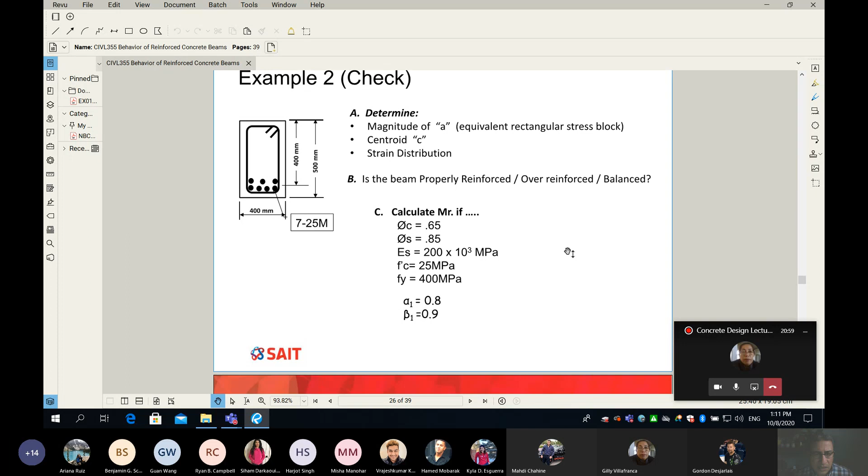Anyway, so let's move on to our class today. And I know that things are getting a little bit difficult. Okay, but again, let's see if saying it one more time can make it any better. So guys, here we are in the process of understanding the beam behavior. And we said in the last two classes that the beam behaves depending on the amount of reinforcement in your beam.

It can be tension failure, where the rebar will yield first before concrete crushes in compression, or both of them, concrete and rebar, fail at the same point, and this is called balanced failure. And then finally, if the concrete crushes first before rebar starts to yield, then it's called compression failure. We talked about this one. We looked at some videos, okay?

And it's obvious to me you guys maybe didn't get it very well, because some of you are looking for resources on the internet. Some of you are going to YouTube and watching videos from other guys. Fantastic. I don't mind. Do it, please, if you can. The bottom line for me is you be the best in concrete design.

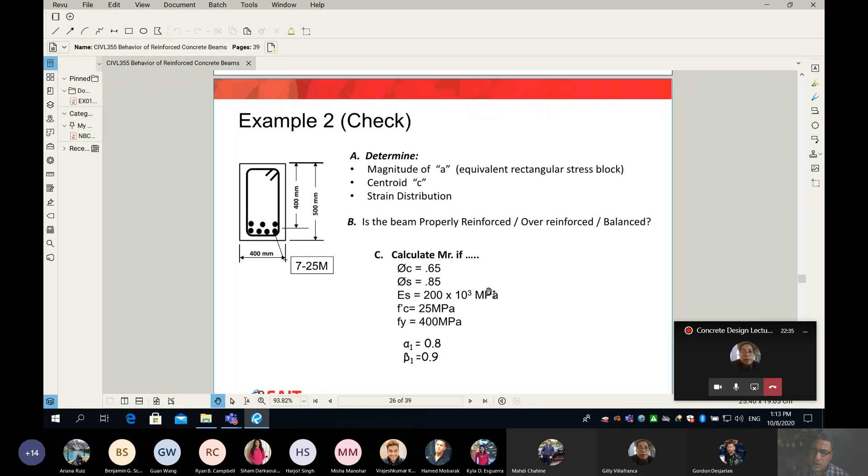But right now we're trying to put things in action by numbers. So here we go. We have a beam here on the left side with some dimensions, some rebar, some concrete strength. And my question is, can you please tell me whether this beam is going to be properly reinforced, overly reinforced, or balanced, with some given information? Now the way we do it is very simple. We follow a very systematic way.

So you can see here, my first step, you have to find your effective depth, because this is really what matters. We don't care about the H, the overall thickness of your beam. From the overall thickness of your beam, we should find the effective depth. In this example, I gave you right away the effective depth to be 400. In the assignment, you will have to do a little bit of effort, like in the lecture on properties of material, to find where the centroid is, and then you can find the D. Anyway, the D here is given as 400.

Next, you find the area of the steel. Remember, this includes only the main reinforcement. No stirrups, hangers, or skin reinforcement. So we have 7 bars, 25M. Hopefully you remember that every 25M bar has 500 square millimeters of area. Which means the total area of steel in my beam is equal to 3,500 square millimeters.

Then always, guys, that's what we do. We assume that the rebar has yielded at failure. This is just an assumption for now. Remember, assumptions are great. They make our life easy. However, before we make a final conclusion, we have to verify the assumption. We have to come back and make sure that whatever we assumed was right.

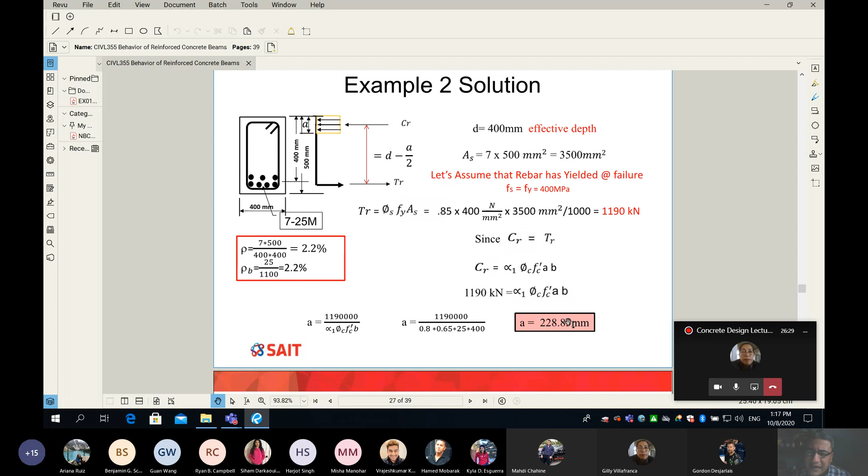You take your stress, you multiply by the area exposed to the stress, which is A times B, where B is the width of your beam and A is the depth of your compression block. From that, you can see everything is known except the depth of your compression block, which is A. So mathematically, we can find the A. Remember, when we find the A, it somehow defines the location of the neutral axis, because the A and the C are related, okay?

How? Very simple. If you want to find where the neutral axis is, as defined by the parameter C here. So guys, this C here defines where my neutral axis is. Very simple. You divide the A by the beta 1, which is 0.9, you get your C. Guys, once you know the little c, as the location of the neutral axis, you can draw your strain diagram. So this here, I'm going to box it out. This is what we call the strain diagram.

On the top, it is always concrete maximum strain, 0.0035. And then at the bottom here, we don't know. So we are going to assume it's epsilon s. We don't know right now whether this number is equal to the epsilon yield or more or less. So we leave it as is. Then we put all the other dimensions. From the top to the neutral axis, it will be C, whatever we got from this equation. And then the rest will be D minus C. We do the similarity of triangles, and then we got this value for the epsilon s.

Once you know the epsilon s, it's a very simple comparison. You compare the epsilon s against a constant number. It doesn't change in my course. It is always going to be 0.002, which is constant for rebar of 400 grade. Maybe if I change my rebar to another grade, then this number will change. But in my course, this number is the same.

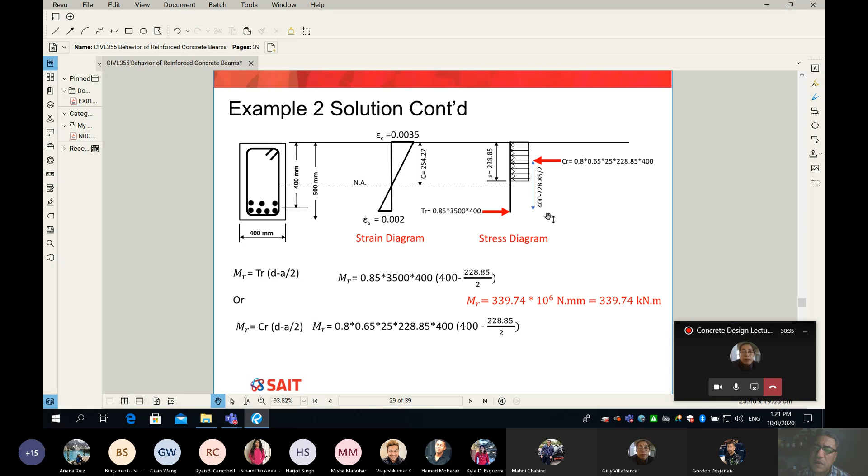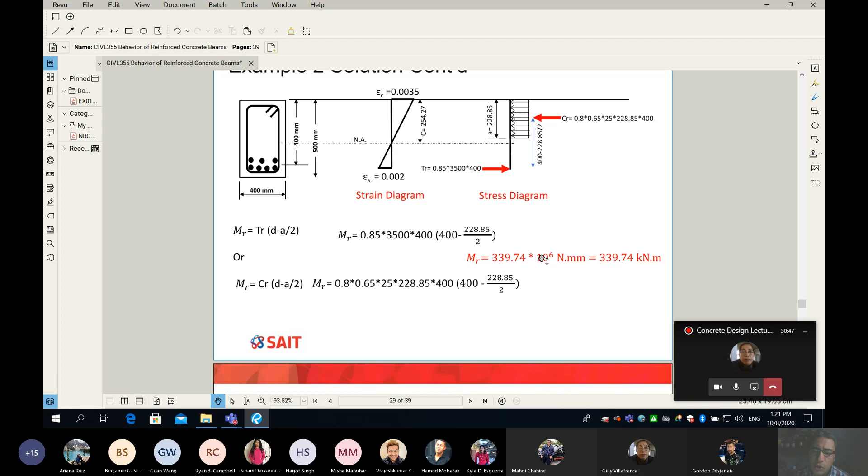And as I said, please calculate the moment of resistance or the beam capacity from both tension and compression. Because simply if we get two numbers to agree, this is a numerical check for my calculations. Are you following so far? I need to hear your voice. Did it make it any better than last class? Yes, we're following. Yes. Thank you, sir. Okay, so now it's time to go.

So far in my class, you have seen two examples by number on two different beams that have different behavior. The first one, example one, tension failure, ductile, properly reinforced. Beam number two was balanced and it is brittle. And question number three, or example number three, which is on my screen right now. So what we did is, for the same beam in question number two, we added like 3 more rebar. You guys see the difference, huh?

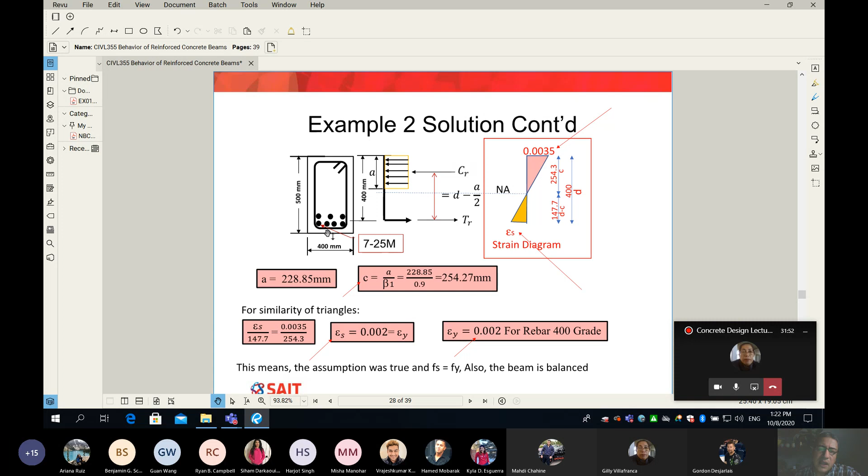If I go back one page, you can see this is my beam here, same dimensions of 500 h, d 400, the width is 400, and it had 7 25M. So I kind of copied the same beam here for example number three. However, what I did is I simply changed the number of the rebar from 7 to 10. It means I added more rebar. Let me do a temperature check.

Before we do calculations or any number, based on what you see in question number two, this beam, what do you think? Is it going to be overly reinforced or properly reinforced or a balanced section? What do you think? Overly. Over. You don't have to think even for a second. We already added more than what made my beam balanced. So if you add even a very small bar to the previous section, your beam will start to be overly reinforced because we have so much rebar in the beam. The stress will be less in the rebar, which will force the concrete to fail first in compression. Okay, so without any calculation, we know by now that it's going to be compression.

However, if I hadn't solved examples 1 and 2 for you, probably you wouldn't know. Yes or no? If this is your first example, would you know whether this is balanced or tension or compression? I guess no, huh? Just by looking at those numbers and eyeballing it, you cannot know. You mentioned that from the very beginning, before you made an example. Yeah, but what I'm saying here is if I never went through examples 1 and 2 and I gave you this beam, you cannot tell just by looking at the beam whether your beam is overly or properly reinforced or a balanced section. So anyway, that's why I'm going to start with exactly the same procedure as if we don't know, and let's see.

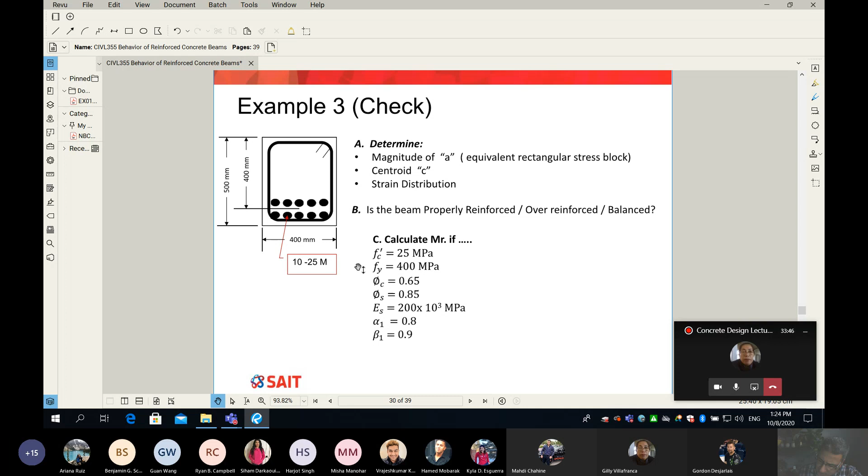So guys, as I said, same thing. You always have to start this way. You always have to say, let's assume that my rebar has yielded, and this assumption could be wrong or could be right. It is right in case your beam is properly reinforced or a balanced section. So I did the assumption already. I said, let's assume that my rebar has yielded, which means mathematically, the stress in the rebar equals 400 MPa. So what we do next is we go ahead and find the depth of the compression block, which is a.

Nothing more than, I'm going to say my total tension in my rebar is equal to my total compression in my concrete. And you guys know my total tension in my rebar is equal to phi S Fy AS, stress multiplied by area, and my total compression in my concrete, again one more time, stress by area, is equal to alpha 1 phi C f'c b a, and then you can see my formula. It will make sense for you.

So a is equal to phi S multiplied by Fy AS divided by alpha 1 phi C f'c and then b. Now all you have to do is, since we know all those numbers, we can simply use this equation to figure out what's the a. So based on the calculation you see right now, the a is 326.92. Okay, and I remind you, depth of equivalent rectangular block. Don't be confused. That is not the location of the neutral axis.

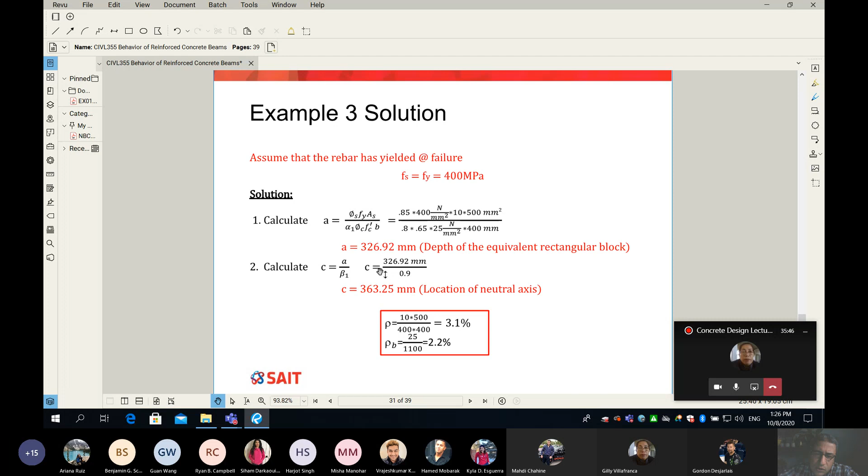Next is, we take the same number, we divide it by beta 1, which we agree in this class is always equal to 0.9. So we get a C, which defines the location of my neutral axis. Okay? Now we know the C. So I'm going to go to the next slide. If you know the C, we do the same thing. We draw one more time our strain diagram, and you can see always on the top, the strain in the concrete is 0.0035. And then you put your C.

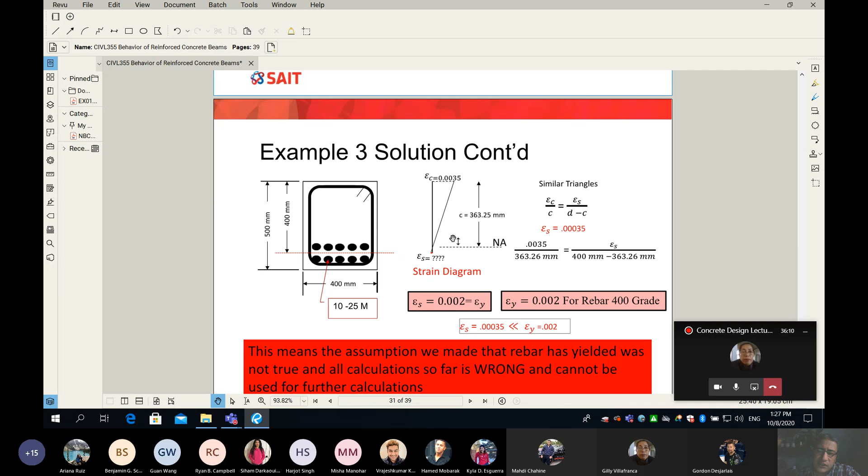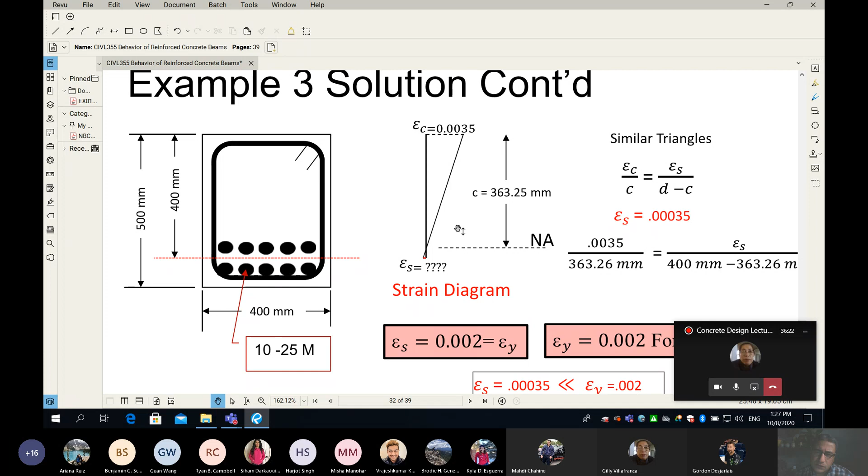And you can see here, the two triangles are still similar, but one is so big and the other one is so small, because my neutral axis is really, really attracted to the bottom, okay? So what you have to do, you do similarity of triangles, and what you will get is epsilon S. We are always trying to figure out what is my strain in the rebar before the failure, because simply this will tell me whether it's a compression or tension or balanced.

So in this example here, the strain in my rebar was only 0.00035. How does this compare to my epsilon yield, which is 0.002? Guess what? It is way less, which means if my strain in my rebar is way less than epsilon yield, I am before the yield. My beam failed when the rebar is still not yielded, okay? And this is the only time.

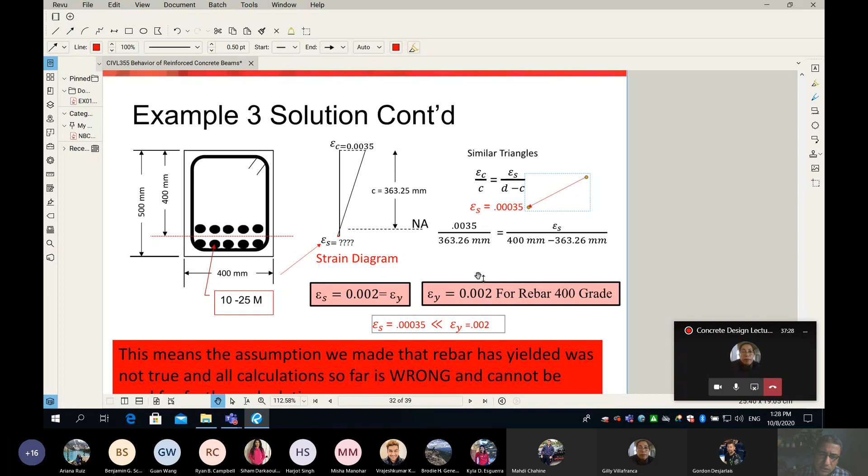Now I'm asking you, was my assumption correct? I'm saying right now that epsilon S is way less than epsilon yield, which is a constant. We are before the yield. So the assumption I made here, is that correct or wrong? No, it's wrong. It is wrong, guys. And if you follow, good for you. And if you don't follow, let me show you one more time, probably the last time, how the stress-strain diagram looks.

So this is my stress-strain diagram. From 0, I go with the line, and then from this point, we do the yield. So you can see this is my critical point here. This is where my rebar has yielded. And this dimension here is what we call epsilon yield. So this number is 0.002, constant, okay? When I estimate my epsilon S, which generally speaking is the strain in the steel when the beam failed, we figure out that my epsilon S was less than epsilon yield. It means I'm on this side of this point. It means before the yield.

And look at this. So where is my stress? Let me dimension that for you. So guys, from this point to this point here, this is my epsilon S, okay? How about my FS? Obviously, it is this dimension, from here vertically to there, and simply this will give you your FS. So this is FS and this horizontal is epsilon S. And you can see the FS is less than your 400, because where is my 400? It's from here to there. This is my 400 MPa, okay?

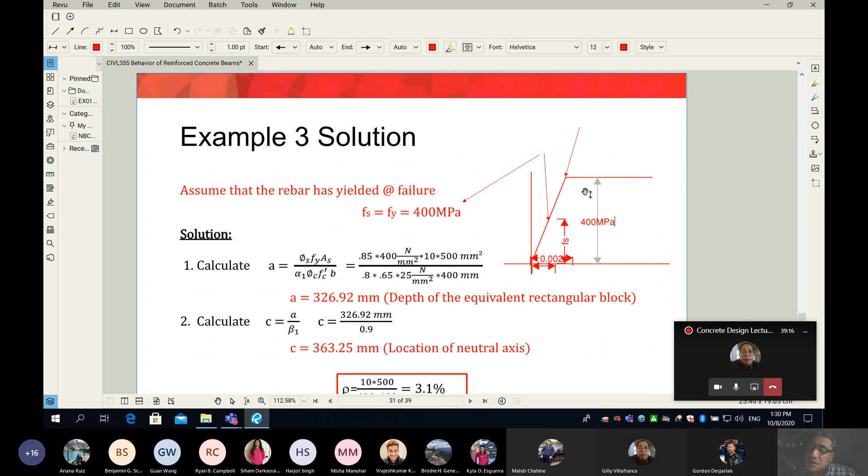So you can see if my epsilon S is less than epsilon yield, it means I'm before the yield, and it means my FS is somewhere less than 400. It means mathematically the assumption I made was wrong. And guys, I put it here in red, and I'll tell you why I put this in red.

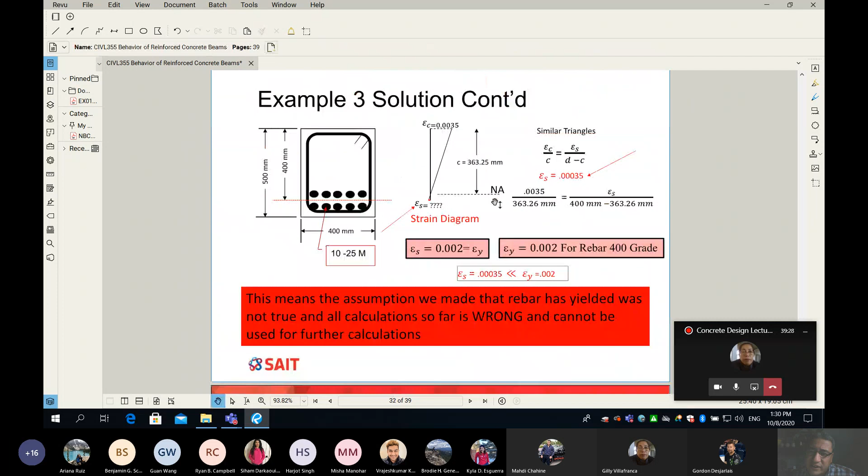You can see how much I'm trying to focus. I will bring your attention to this box, because let's read it first and I will tell you what's the problem. So this means the assumption we made that rebar has yielded was not true, and all calculations so far are wrong, and I put it in capital letters, and cannot be used for further calculations.

And I know some of you will say, why you do that? I'll share with you guys. Every year for the last 6 years, 2 semesters per year, I explain this, and guess what? Students, they say epsilon S is less than epsilon yield, and then they keep going. They keep going. I don't know why. Okay, so please, hopefully this is clear in the online education.

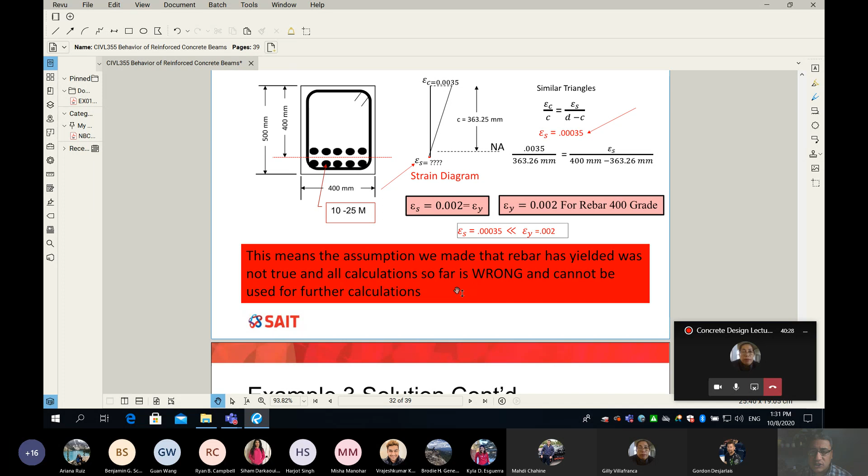If you found out that the epsilon S is less than epsilon yield, it means it's a compression failure. It means your assumption was wrong. So please don't use any of those numbers, whether the A or the C or anything like that. Never use it in any further calculations. Okay, next is, let's see what can we do if this happens. And I put again, look at the red color and look at the capital letters, solution again. So please, that's what we have to do.

I said the beam is overly reinforced. Hopefully everyone agrees. The beam is overly reinforced, and we must recalculate A using quadratic equation. And I know some of you will say, what do you mean quadratic equation? Please be patient, okay? Be patient.

Now, if you love math, follow me. If you don't love math, take a nap. Who loves math in this class? Show your hands if you love math. Serious. Oh my gosh. Keep going. I want to see that. We have Martin, Garcia, Brody, Baron, Mr. Sunny.

Okay, because I'm going to go into a mathematical discussion, and I know some of you love math. And if you love math, follow me. And I personally am a believer in math. Math is the best thing in the world. Okay, so follow me. If you don't like math, please take a nap until I wake you up. Okay. Now, guys, here we go.

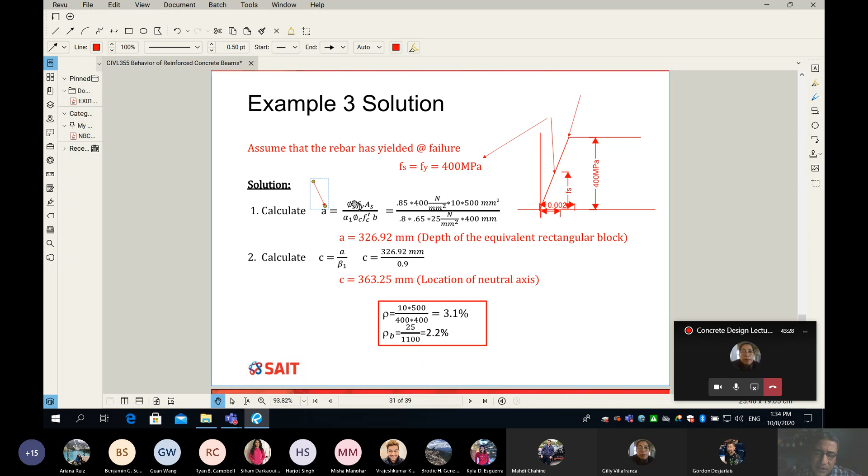Guys, when we do that, this time we can rewrite the equation one more time. There is nothing super science here. I want you to compare between this equation and this equation here. Do you see any difference? There is only one difference. In this equation here, my Fs was equal to F yield equal to 400. How about here? We said that Fs is unknown.

And that's why you see A is unknown, and also you see Fs is unknown. So far, we have an equation, I'm going to call it equation number 1, and it is a function of 2 unknowns, A and Fs. Are you following so far? So one equation that has 2 unknowns. Can we solve those, if you have only one equation that has 2 unknowns?

I think we had the same discussion early in my class about determinate and indeterminate systems. We need the number of equations to be equal to the number of unknowns. Otherwise, we cannot solve the system of equations. And because we have 2 unknowns and we have one equation so far, it means we can't. So let's try to find other equations.

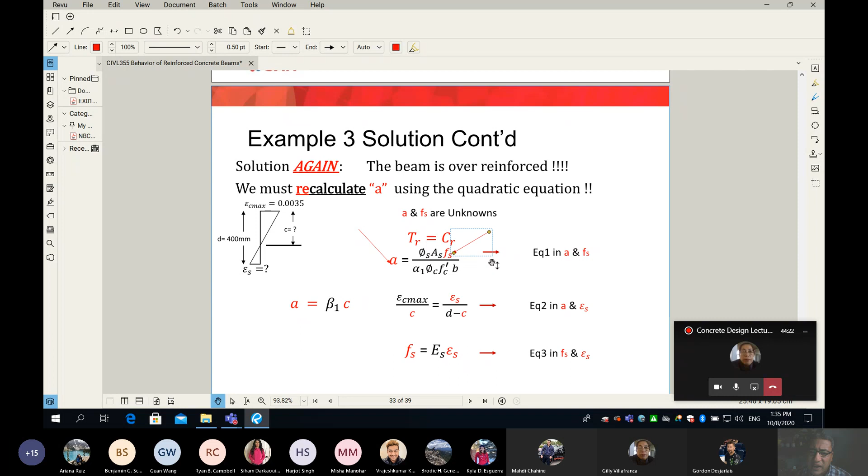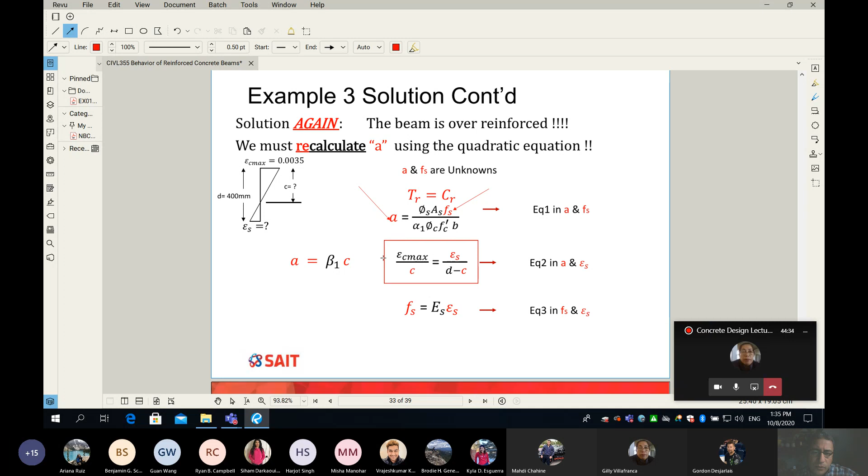So the other equation, it's here, equation number 2, and this equation, I'm going to box it out. This equation here comes from the similarity of the triangles. So this equation comes from here. Look at this figure on the left, which is the strain diagram. So not super science. Those triangles, same as we did 2 times so far or 3 times so far, they are similar, which means 0.0035, which is epsilon C maximum, divided by my C equals my epsilon S.

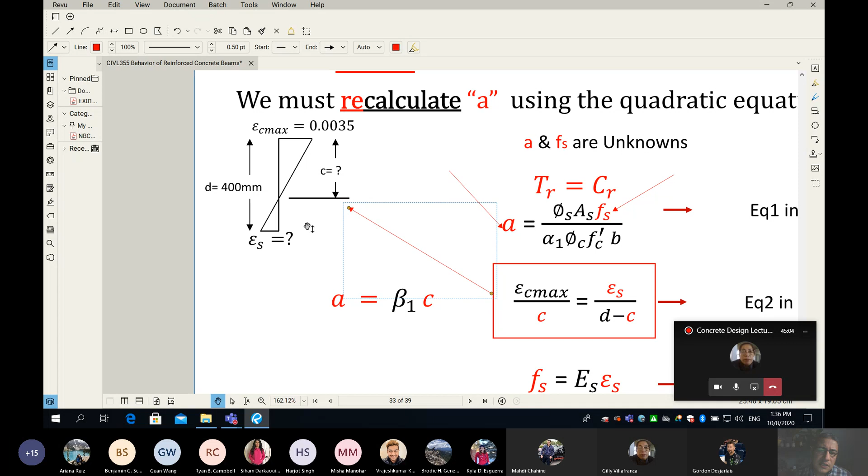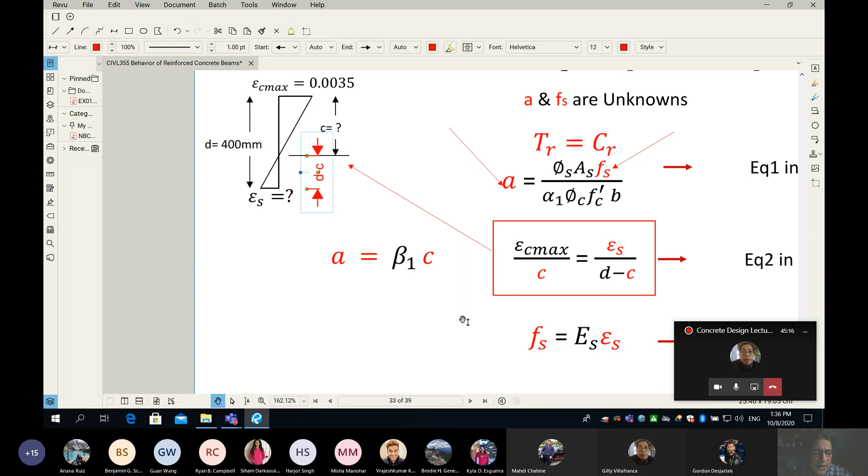And remember, I don't know how much, so it's unknown, divided by my D minus C, because this base here, this dimension here, let me dimension it for you. This dimension from here to there is D minus C, if you agree. Okay, so no super science. I have created here another equation, and let's find out.

And I want to mention something here before I continue, guys. Whenever we know the C, we know the A. Whenever we know the A, we know the C, because they are connected. Look at this equation here. This equation relates the A with the C. So which means you can think about this equation as an equation in A and epsilon S.

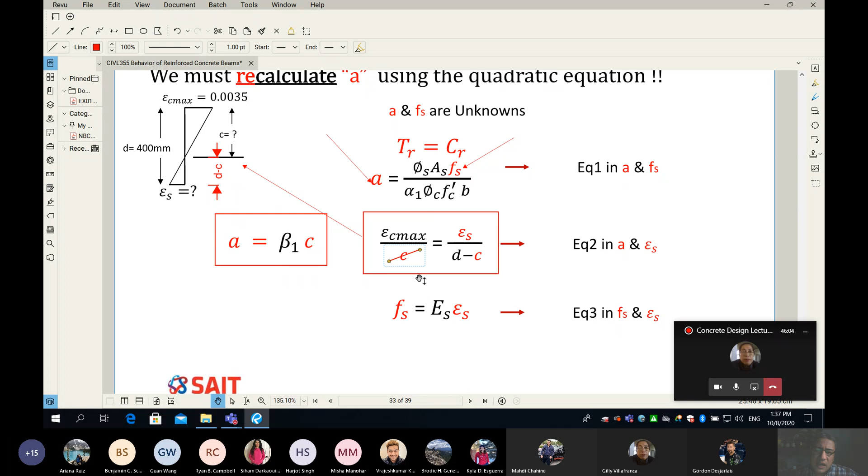Would you agree? If I tell you that this equation is an equation that relates the epsilon S with the C, sorry, with the A, because it relates to the C and C is related to the A. It means in this equation, I can simply replace every C by A over beta 1. So I can cancel this C here and I can put here A over beta 1.

Anyway, so far, let me tell you what are the unknowns in this equation. I color them with red so you guys see it better. So we have here my epsilon S, strain in my rebar. I don't know how much, and I don't know where is my neutral axis, which is A or C.

Now, guys, so far, let me share with you. Now we have 2 equations, but how many unknowns? A and C is the same, so that's A. So that's 1. And then we have Fs and we have epsilon S. So far, I have 2 equations, but I have 3 unknowns. So far, my system of equations is indeterminate, and I cannot solve it.

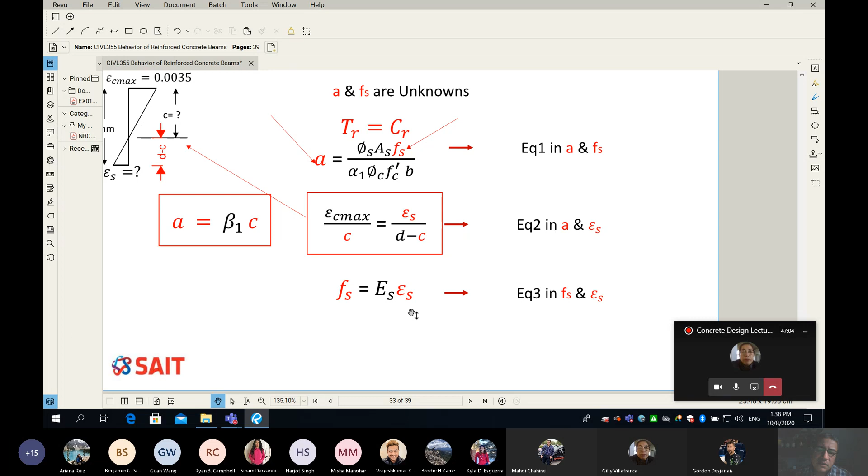Now, here is my 3rd equation, equation number 3, which is the relationship between the Fs and epsilon S. This relationship, we said it early on in my class. You guys remember when I said the first part of the test will be a line equation before the yield, and any line equation looks like so. So let me show you.

So any line equation will be y equals mx plus c. That's in general a line equation. Since we have no intercept because my line goes through 0, I can remove the c, and I'm left with mx. Same here. So my m is my modulus of elasticity, Es, and this will be my epsilon s, and this will be my stress here. Not my stress or your stress, it's the rebar stress. So this will be stress, and this will be strain.

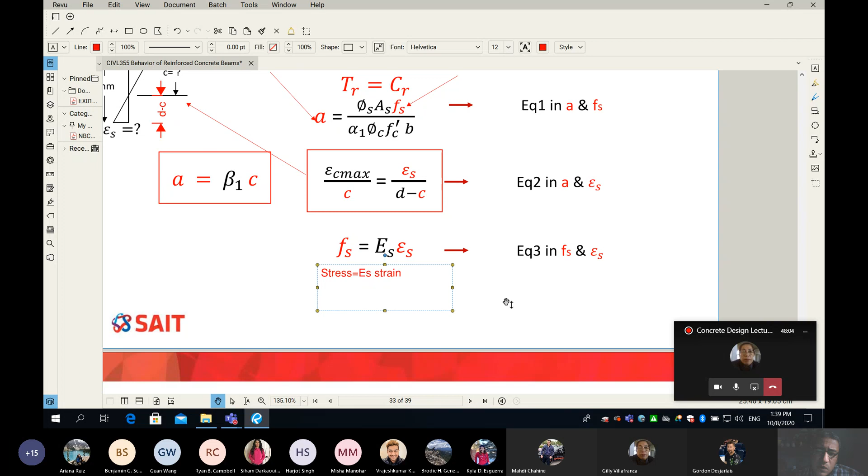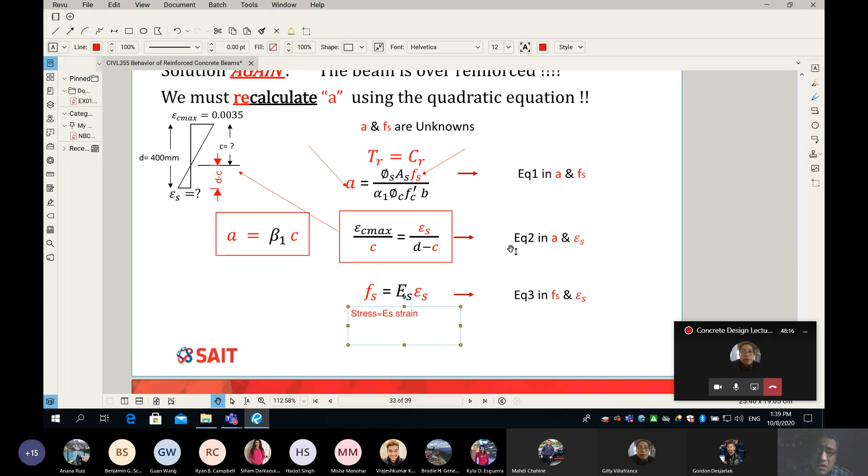So here we go, guys. Now we have 3 equations and 3 unknowns. Okay, Tahir, oh my God, are we turning concrete class into mathematics class? Not really, because it's not really a mathematics class. So I want you only to understand the beginning, and then we're able to back substitute and do all the magic, and that's what you will get.

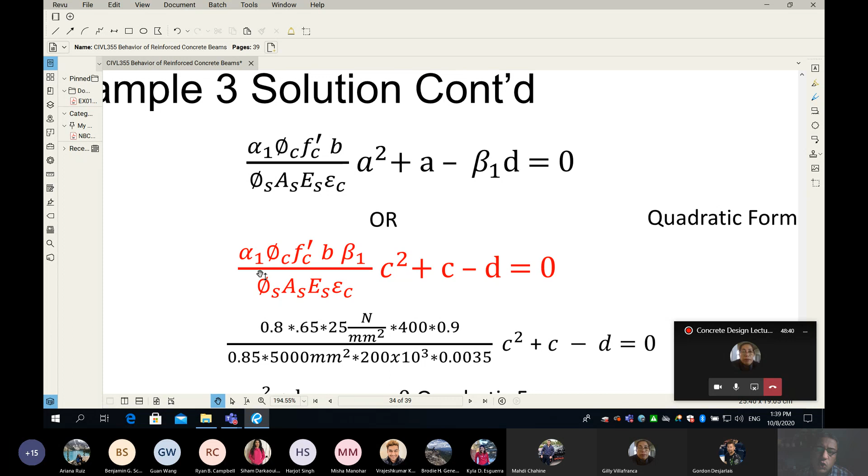What you will get is this equation, or this equation. It depends on which you're solving for. If you're solving for A, then you'll get the first form. If you're solving for C, we will get the second form. And I put in red the one in C. Just an agreement, it's up to you. It doesn't matter for me. But let's agree to use only the red one. Let's solve for C. Okay?

And guys, I ask you, when you look at this equation, which is a function of the C, is it a line or constant or quadratic or third order polynomial or fourth order polynomial? What do you think?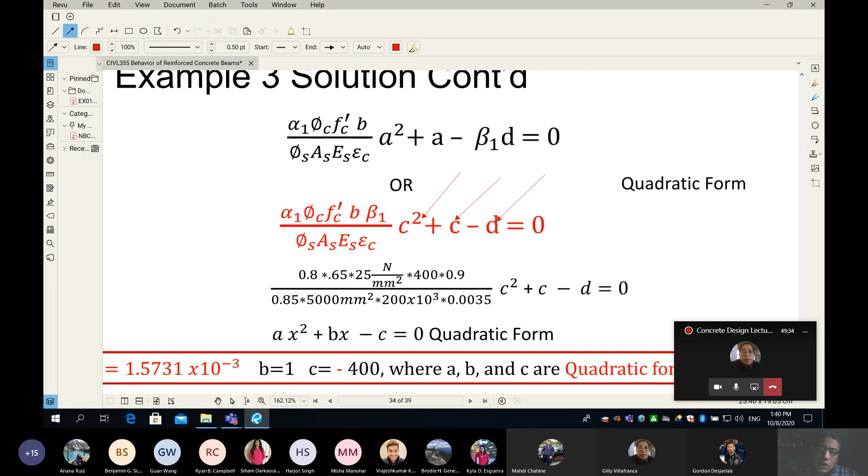What do you think? I need somebody who understands math. It's quadratic. Okay. Are you guys in agreement with Gilly? That's quadratic, because quadratic is in the slides, huh? But look at this, please. You can see here we have the C raised to the power 2, and then we have a C with power 1, and then we have C to the power 0, which is my constant. So this is a math called quadratic form.

Okay, and you can see, guys, look at the equation. I know it's kind of very scary, and I know some of you are scared by now, but look how easy we can look at the equation when we change all those parameters with numbers. Okay, guys, please, on your own, just repeat with me. Alpha 1 is equal to 0.8. Phi C is equal to 0.65. FC dash is equal to 25 MPa.

B, the width of your beam, is equal to 400. Where can I get that? It's from the problem. Go up. And then beta 1 is equal to 0.9. Next is my phi S, always equal to 0.85. And then area of steel, we have 10 bars, 25M. So you multiply 10 times 500, we have 5,000. And ES, the modulus of elasticity of the rebar, is always equal to 200,000 MPa.

And then finally, epsilon C maximum is equal to 0.0035. And once you do that, your life becomes super easy. And also when you look at the D, this number is equal to 400, huh? 400. This was your D. Okay. Now, you can totally for now forget about concrete. And this is a second order polynomial or a quadratic form that we can solve to find the value of the C. Guys, remember, if you are good at math, you will understand this, huh?

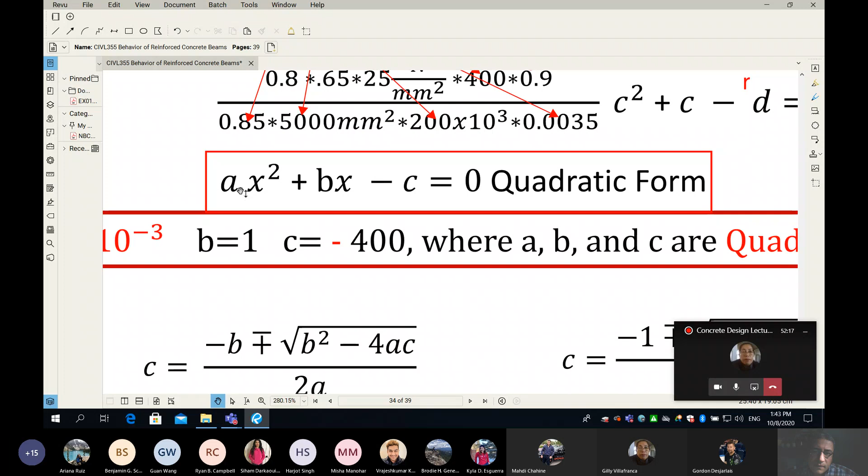I know that some of you by now may be sleepy, but let me ask you, in this formula here, is the A the depth of the equivalent compression block? Yes or no? No. Can I get somebody else to tell me yes or no? I need probably 2 or 3. I'm asking you my question. In this equation here, the little a, is it the depth of the equivalent compression block? No. Okay, guys, this is what we call the coefficient of your quadratic form.

So all you have to do is simply do all the math, and I did it on your behalf. If you have a calculator, please do it now. For a second, just do the math and make sure that this number is equal to 1.5731 times 10 to the power minus 3. Please do it now. Everyone in the class, go ahead and check me and make sure that my coefficient of x squared is 1.5731 times 10 to the power negative 3.

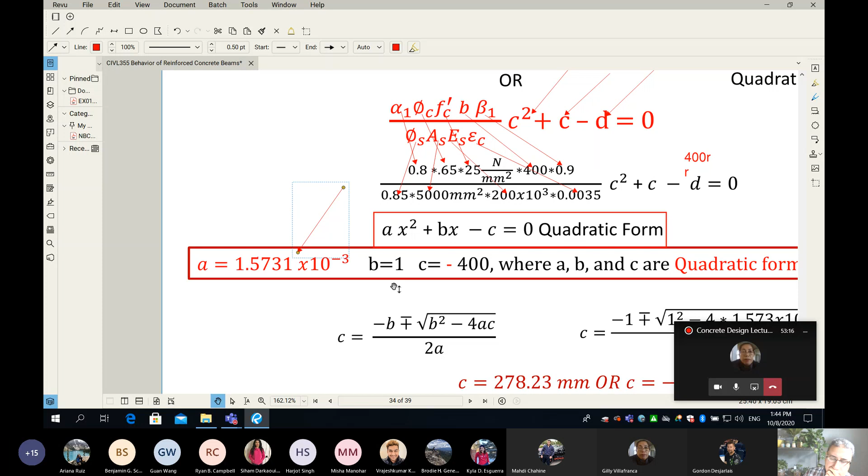Yeah, you're good. I need everyone, please, in this class. You don't have to tell me, but at least do the calculation on your own.

Okay. One more thing to consider here is, what is the coefficient of C? You can see, very simple. It is always 1. What is the constant here in this equation? Please watch this. It is minus 400. I think this has to change. I think I've made a mistake.

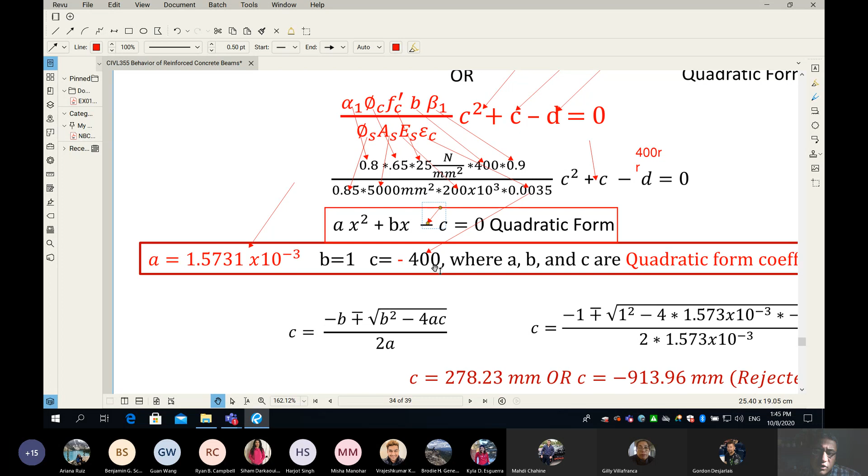So in general, quadratic form is ax squared plus bx plus c. I'm sorry for that. So this sign here has to be a plus sign. But again, it doesn't change our discussion, because I said c, which is the constant, is equal to negative 400, not 400. Look at this number. It is minus d, so that's negative 400.

Okay. Now, how can we solve this guy? Okay. So guys, I know that you guys are good at math and maybe you did your math class and that's how we solve it, but I will make your life way easier. Last year when I had the class, I always reminded students: if you have a quadratic form, it gives you two roots. I'm gonna zoom in here. So how do you find the roots of a quadratic form?

It is minus the coefficient of x. I'm not gonna say A or B, otherwise you'll be confused, because I'm using here the same A and B that are connected to my class: C is the neutral axis, A is the depth of the compression block, and B is the width of the beam. However, in this equation here, those have no business with concrete. This is mathematics, okay? And that's how we solve and find the roots of a quadratic form, okay?

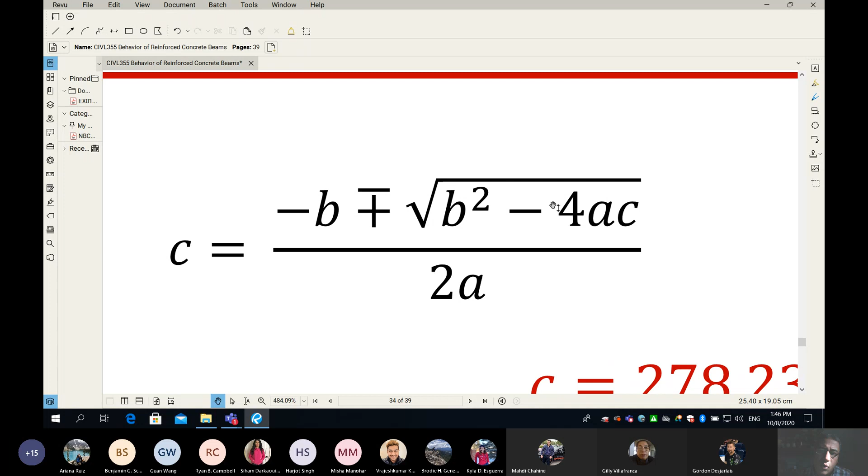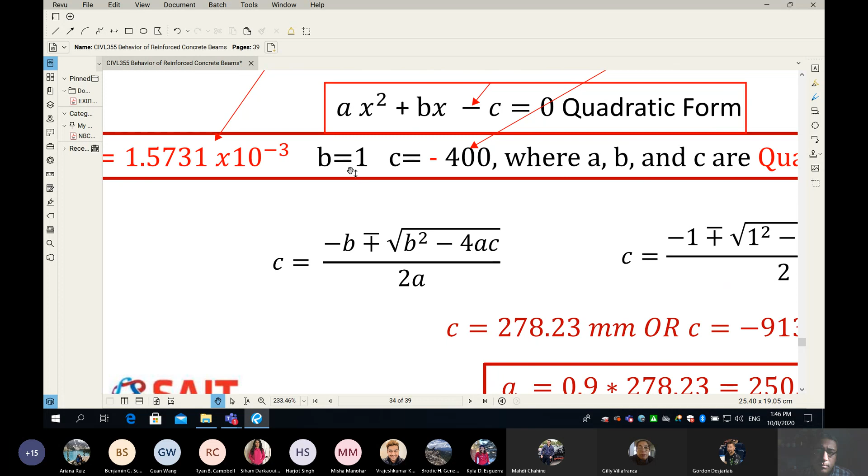So in this problem here, your A is this number, and it is not the depth of the compression block. Your B is equal to 1, your C is equal to minus 400. You put those numbers like so, and you will get two roots. Why two roots? Because any polynomial has a number of roots equal to the order of the polynomial. So a first order has one root, second order has two roots, third order has three roots, and so on, okay?

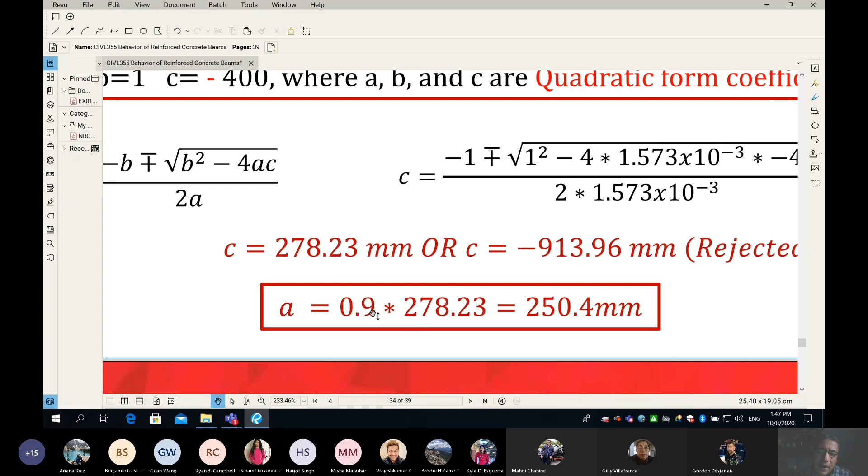So here we got two values for the C. Which one do you think will be okay and which one is wrong? It's already on my slides. When we say C, which represents a physical value, the depth of the neutral axis, we are not expecting this number to be negative. So you can see I said this one is rejected. So we find the value of the C, and once you know the C, you can find the A by multiplying the C by beta 1, which is 0.9. Are you guys following?

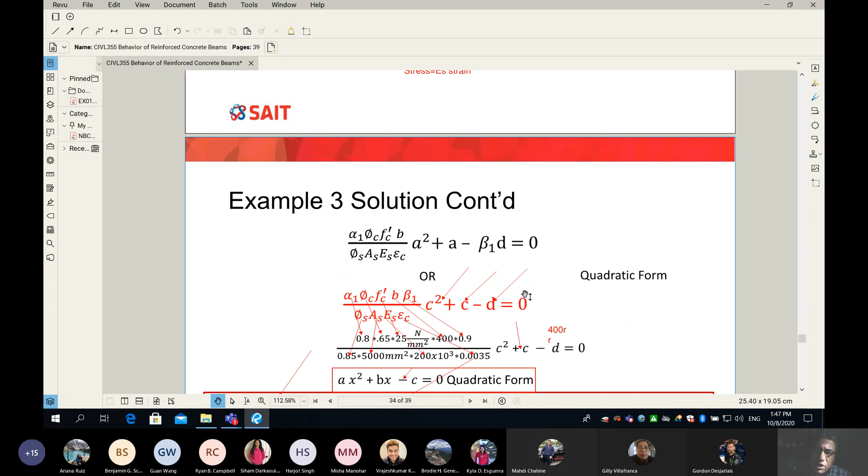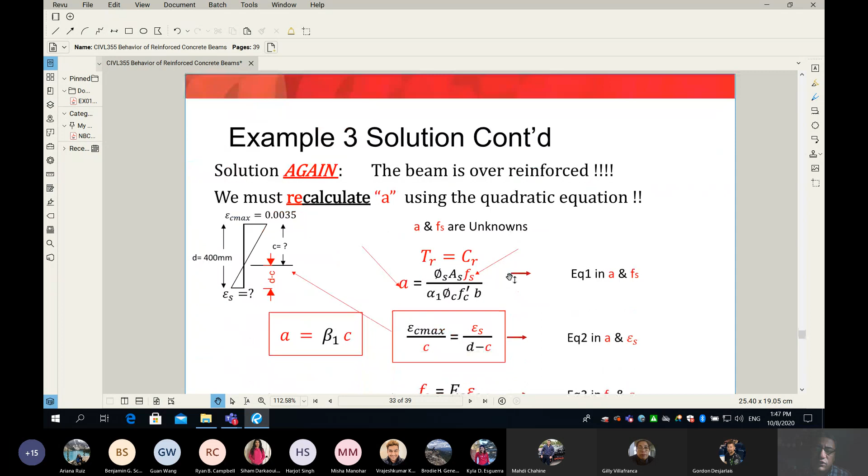Yes. Okay, before the break, I'll have something to show to you. In my assignment or my exam, if my beam is a compression failure, it requires more work, because after you figure out that it is a compression failure, you cannot use the old A and old C. You have to figure them out. And by the way, you don't have to memorize this derivation. That's only for whoever loves math. You can simply use this equation here directly.

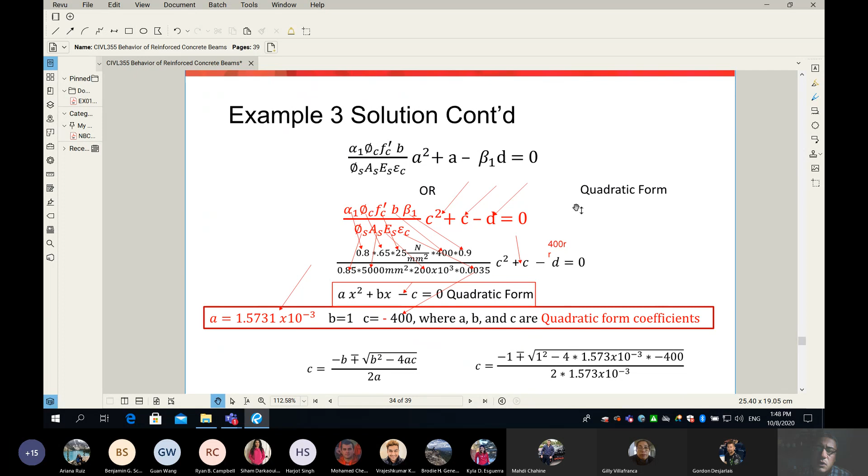Okay. Now, do I have to go through this pain to find the C? I'll give you a clue, and maybe all you guys know that. Just Google it. So you just go here and you type quadratic equation solver or calculator. Guess what? There are so many of them on the internet. Very simple. This is the solver. I come here, and can anybody help me with the A and B and C? 1.5A. It's 0.00.

Let me do that myself, okay? So if I go back to here, my A is 0.0015731, multiplied by x squared, plus x, minus 400 equal to 0. So you're kind of writing your equation, right? And you're supposed to get the answer, and maybe I'm doing a mistake here. I think maybe that's the one. Yeah, exactly. So you can see here, I just write the equation and it simply solves it for you.

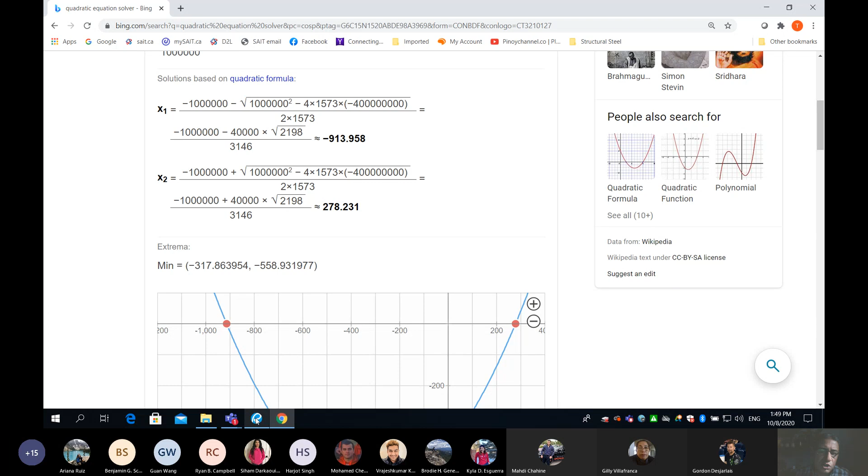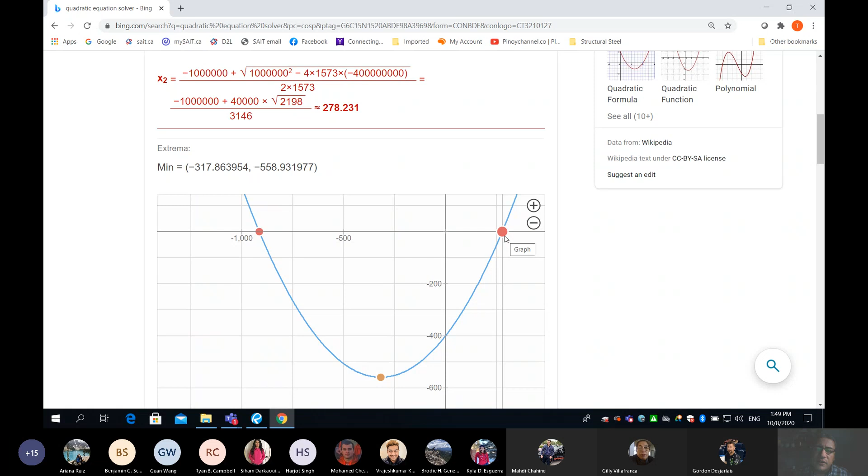You have root number 1, which is x1, and then root number 2, which is 278, which matches my number here. And you also get the graph. So this is the graph of the parabola, and you can see there is a negative root, which we don't use, and there is a positive root, and that root is what we get. Okay, are you following, guys?